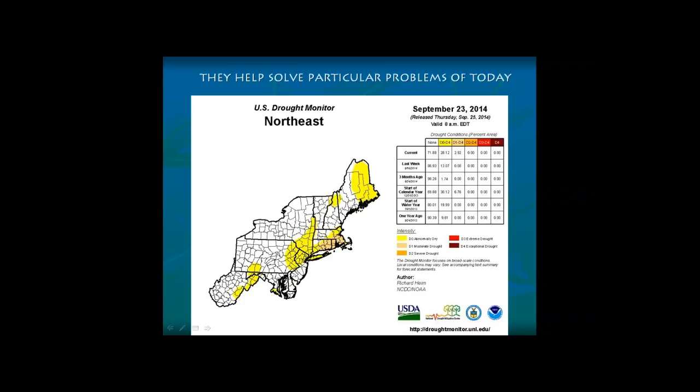And you can say that rain gardens help to solve particular problems of today. All you have to do these days is turn on the news or read a newspaper, if you still do that, if you're an older type like I am, and you'll see the reasons why rain gardens are important. Drought. Not so much in the Northeast, although we do have drought in the Northeast, but the stories of the fires in California are in the news every day, and what we also learn is that the big, huge aquifer out west there is being seriously depleted. Aquifers everywhere are being depleted.

Here in the Northeast, and I'm sure all over the country, any town that pumps its water from a well often in the summer will have water restrictions because the wells start to run dry or they get very low. And so this concept of catching the stormwater and returning it to the aquifer rather than have it run down into a storm drain is something that people can understand.

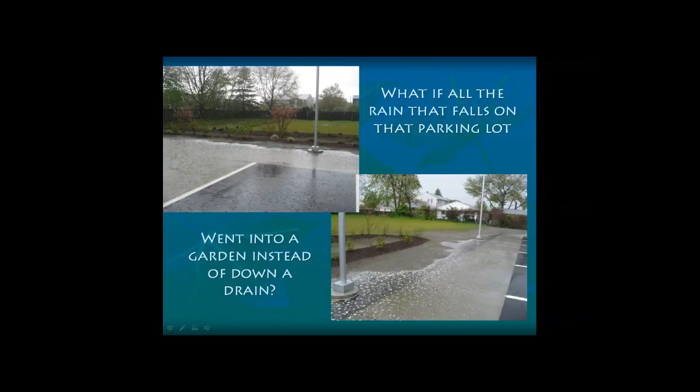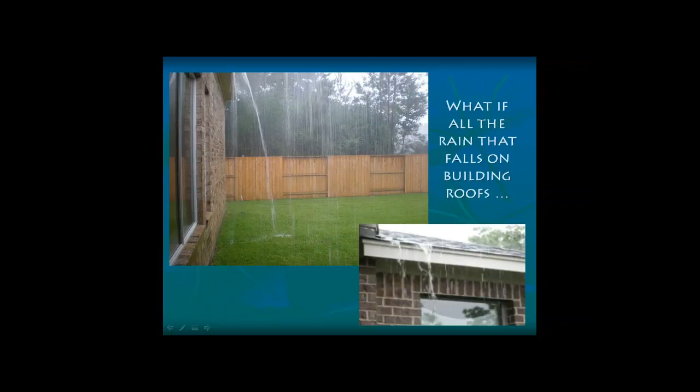And you can ask, if it's raining outside, ask people to take a look at the parking lot or the roof that rain is falling on, and think about where all that rain is going. Sometimes it's puddling in very inconvenient places, but usually it's going down a storm drain, and those storm drains pipe the water into our rivers, into our bays, when we could use a rain garden to return the water to the aquifers. So these are all concepts that civic groups can usually understand very well.

You can introduce the concept that a rain garden is a bowl-shaped garden rather than a mounded garden. People are used to seeing gardens that are bermed up just a little bit with mulch. That's been the traditional way to do a garden. But if you ask them to kind of just turn that thinking upside down and think about a bowl-shaped garden that's planted the same way, mulched the same way, and you can use the same kind of things that you would use in any garden, fence, an arbor, sculpture, bird bath, but it's bowl-shaped instead of mounded.

One of the misconceptions that I've run into is that people think, if they don't know anything about it, they think a rain garden is a water garden. They think of it as a pond. And actually, a rain garden is not a pond, although it is a garden that catches water. It's not a pond or a water feature. So that's a misconception that you can correct.

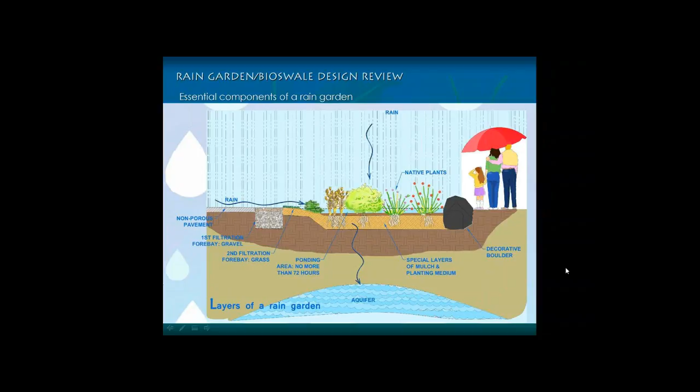And I like to use decorative boulders clustered just in small areas around the edge of my rain gardens, because since they sink down into the earth, they can be not as noticeable as a mounded up garden, and a boulder or some other sculptural element lends a little more presence to the garden. So those are the layers of a rain garden.

So if you're either creating some construction drawings for a rain garden, or say you're on a planning board and you're being presented with construction drawings for rain gardens, there are some aspects for these public civic gardens that really are necessary for you to see on the plans. And I have two examples here. I'll just show you this one quickly. One, of course, is a layout plan for the garden itself.

One is going to be a section through the rain garden, and you'll see the section line A A prime in the layout plan there, and that's going to be labeled with the different layers that we just talked about. That's so the contractor really knows what they're doing and what the different depths are, what the different materials are. On the upper right, you see that little recipe for the planting medium. This just happens to be the recipe that I use.

There are a bunch of different ones out there, but the most important thing to notice is that it's mostly sand, believe it or not. There's a little bit of silt, much less clay or no clay if possible. Sand is really what you need to use for this, and then after this is mixed, you mix in a little bit of aged compost too to give the plants just a little nutrition.

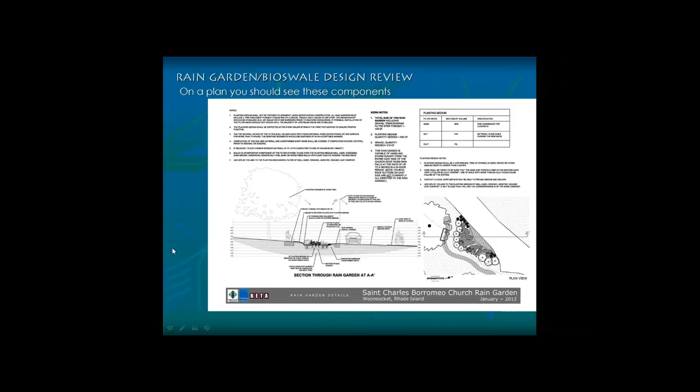That's very important. And then just your general planting notes over on the left there, and we'll talk about what those contain. Here's another one. It's maybe a little bit more readable. I actually have a section of materials quantities here. This is a rain garden where parts of it were being donated, and so if you're sending a sheet like this out to different suppliers, it's always nice to have your quantities calculated.

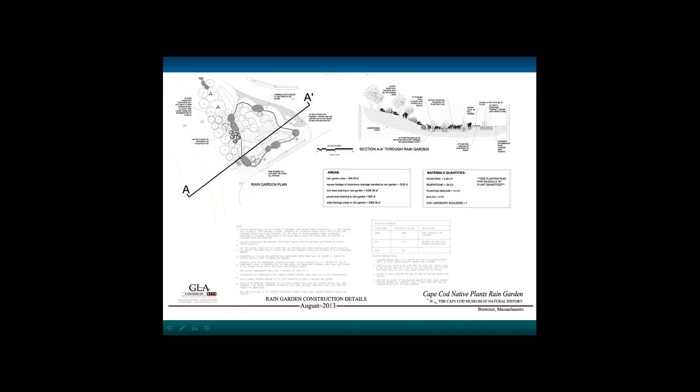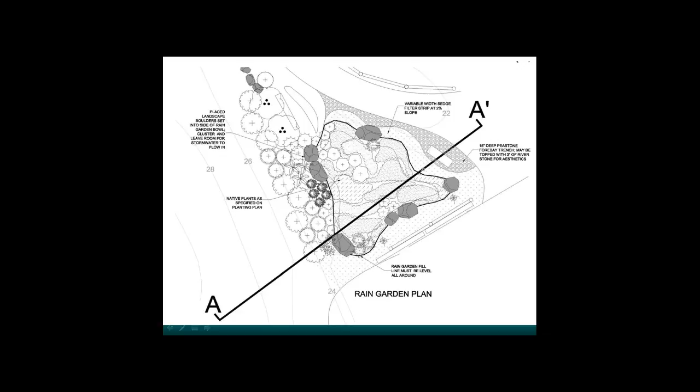And we'll just look a little closer at some of these elements. Here's the layout plan. And you've called out the different areas and the different materials, and you would have also called out the dimensions on this one. There's the section through the garden. Really helps the contractor to visualize what they're doing.

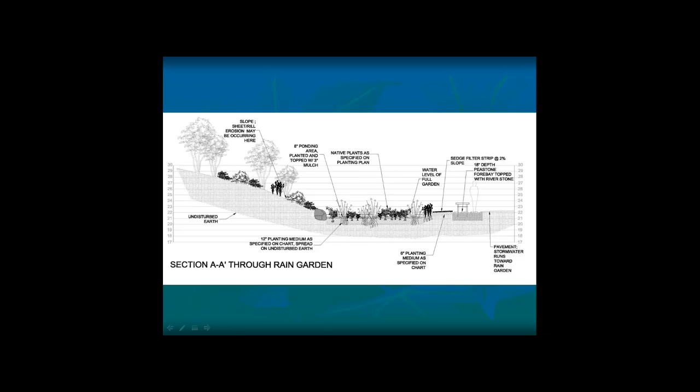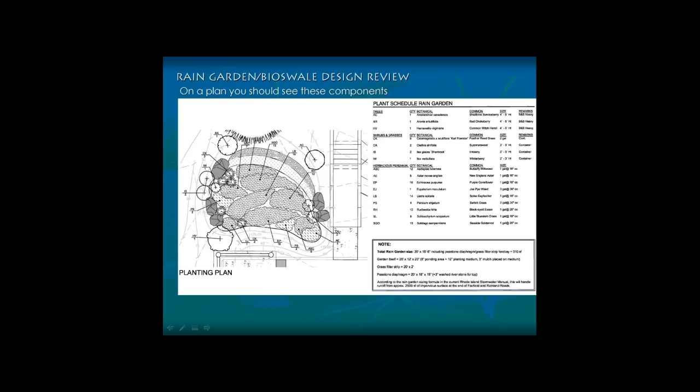The thing about a rain garden is that because it is mostly dry and every once in a while very wet, you need to choose your plants carefully because they need to be able to withstand short periods of inundation, having their roots completely underwater, and then long periods of dryness. It might be a month or more of dryness. Because once the garden is established, you do irrigate to establish the plants, but once it's established, the only way those plants are going to get water is if there's a storm. So I find that you end up choosing plants that you would often just see growing by the roadside, the goldenrods, the asters, that sort of thing.

Here is a really important aspect. It's the sizing. You have to remember that a civic rain garden is a stormwater practice. It's beautiful, it touches our hearts, but it's also an engineered thing. And so it's got to be sized properly. And so you need to see on the plan some kind of evidence that someone's been brought in to properly calculate the amount of stormwater that the rain garden is going to accept.

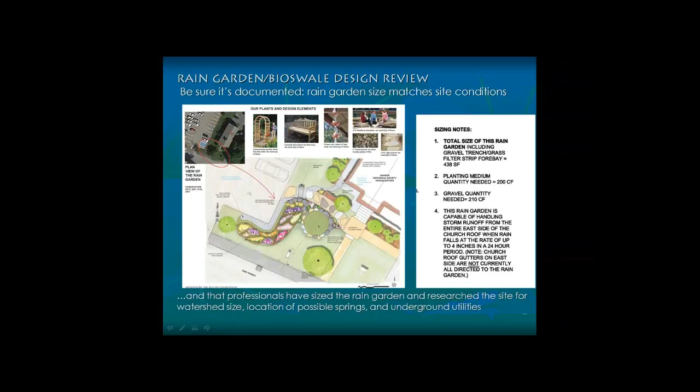And in this slide you see a little hand-drawn plan of a rain garden we'll see later on in the show. But you can see there's a parking lot. The rain garden is adjacent to a parking lot and also adjacent to a building roof, that Sharon Historical Society headquarters. And so I went in and actually calculated the area for a certain number of year storm, and calculated the amount of rain that would be coming into the garden at once, and then I calculated the size.

There are online tools you can use to calculate this, but I would strongly advise bringing in a professional if you're doing a rain garden like this. It could be a professional who's volunteering on your board. It doesn't have to be someone you hire, but you really need a landscape architect or an engineer who knows what they're doing, because there are instances of rain gardens that overflow because they have not been sized correctly.

And some of the issues that have to be checked are taking a look at the soil. Did someone dig a test pit and see what's down there? Does it actually perk? Is there a slab of clay maybe, or you might be right over ledge, and the filtration rate might be very, very slow. Often in a town center or near a sidewalk, there are going to be underground utilities you have to know about. I have heard of instances where rain gardens were dug near underground springs that nobody knew about, and the rain garden completely failed. So you need to know about those things.

And then also, if you're working in a town center that has a drain system already, you can sometimes connect your rain garden with those drains so that if you need to do a smaller rain garden and you do expect it to overflow every once in a while, the existing drains can accept that overflow. But you need to coordinate that with an engineer. So this is sort of a caveat, not to just go out there and do it yourself unless you have this kind of expertise at your fingertips.

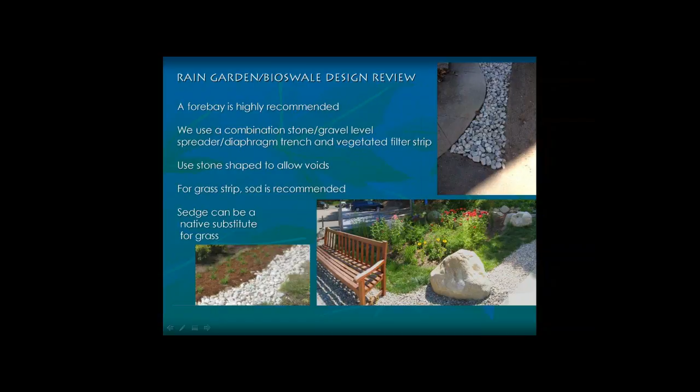And there's a forebay all ready to go. That's right in the middle of a parking lot, and you can see the gravel strip, and then that is actually a sodded grass strip after that.

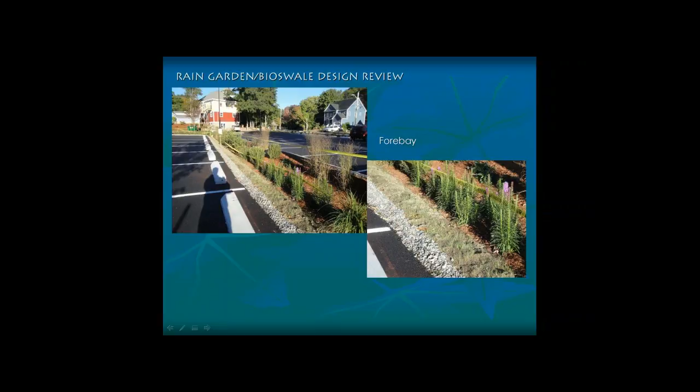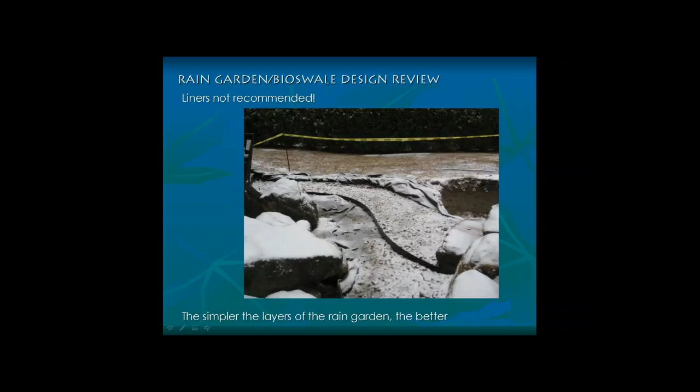This contractor had put a liner at the bottom of this forebay strip, and I had to have him take the whole thing out. Unfortunately, liners are not recommended. So if you see that on a detail, you should take it out.

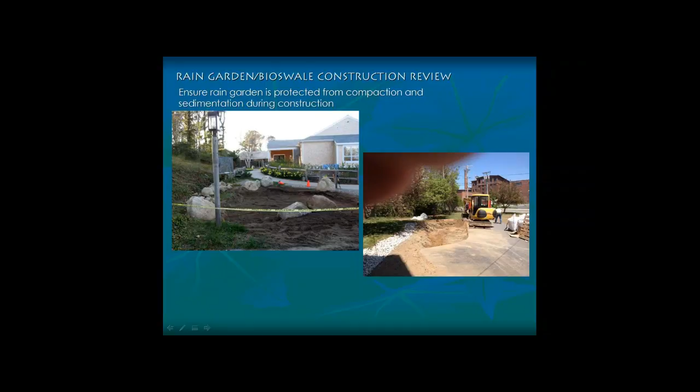And on the right, you see how this contractor has been sweeping the silt away from the edge of the garden during the entire process of constructing this garden. He was out there every half hour with his broom, just getting that silt away so that it doesn't clog up the garden before we've even got the garden launched.

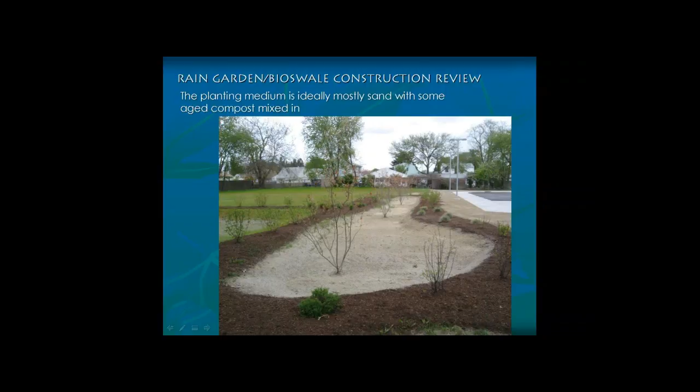And here we have a look at that planting medium. This rain garden hasn't been mulched, and we'll talk about that a little bit later. There is a controversy over mulching rain gardens, but it gives you a really good look at the planting medium, and you can see how sandy that is.

And here's just another look at that planting medium recipe. I just want to say this is not proprietary. You can find these recipes online. You can often find them in your state stormwater guidance manual, or sometimes in your highway manual for your state.

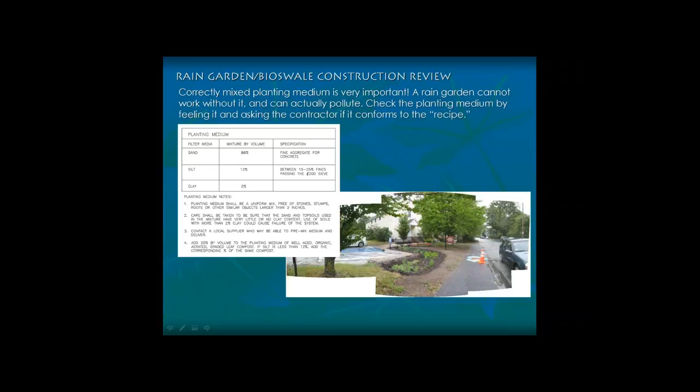So a couple of other things. As I mentioned, contractors are still gaining understanding, and sometimes you really do need to explain things. On the left is that rain garden that had the liner put in it. The other thing that was done wrong there is that they separated the materials with a strip of metal edging. They've separated the gravel forebay from the filter medium, so basically that's going to stop the water from going in there. So that had to be taken out also.

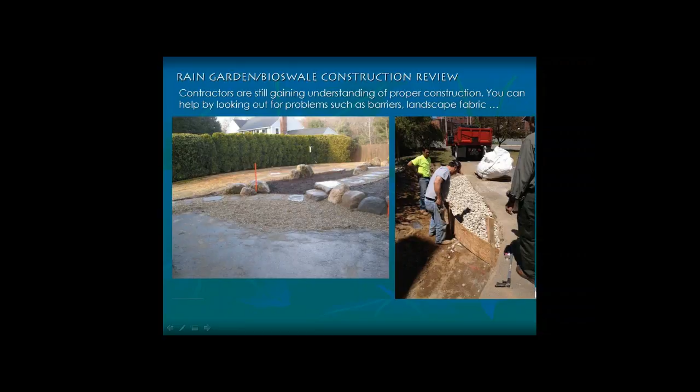On the right, you see the correct way to do this when you're constructing the garden. If you need to butt up your gravel with your planting medium, say you don't have a grass filter strip right in that area, what you can do is drive in some stakes, bend a board, fill the side that needs the gravel with gravel, fill the other side with your planting medium, and then just pull your boards and your stakes out, and everything stays exactly where it should go.

Some other things to look for if you're doing a rain garden in an island in a parking lot. This is information that comes from out west, Washington State. They've found that often the little curb cut entries that are placed to accept the stormwater into the island are not big enough. And so what happens is the stormwater actually just shoots right past the rain garden without going in. So they're recommending now that you make your curb cuts long enough, and also grade your parking lot so that it really guides the stormwater right into where it's supposed to go.

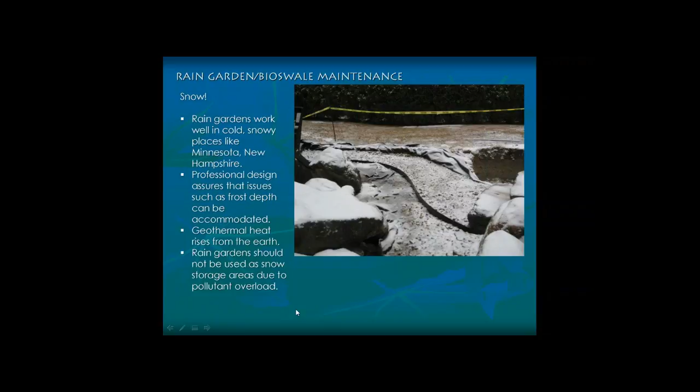However, rain gardens should never be used as snow storage areas, and that's just because that stored snow usually has a lot of pollutants in it. There's a lot of garbage in there, there's salt, and a rain garden just can't clean that well. So avoid using a rain garden if it's a snow storage area that you're also looking for there.

So for the particular parts of the rain garden for maintenance, the forebay, you can rake it out, you can pick up the garbage. If your municipality has a silt vacuum, which is a piece of equipment that's being purchased more and more now by localities, because a lot of places do have permeable pavements now, and the best way to get silt and things that will clog permeable pavement out is to actually use a pavement vacuum. And your forebay gravel strip can be vacuumed also.

You can mow the grass strip. If it's sedge, you don't have to mow it. The sedge will only grow a certain height. The mulch should be refreshed as often as you might refresh your mulch. Just be certain not to put fresh new mulch on your rain garden, because, and we'll talk about this a little bit later, that can actually contribute to the pollutants, to nitrogen in the rain garden.

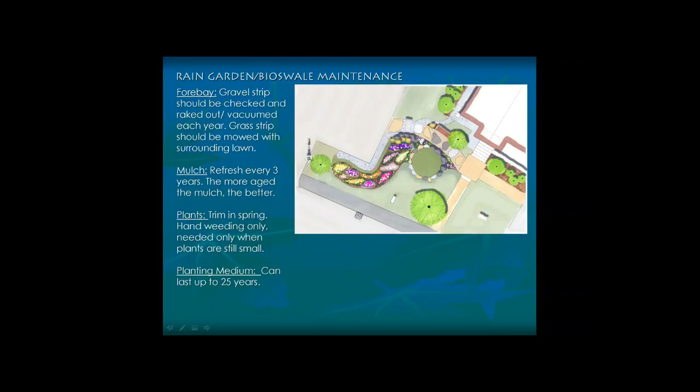The plants can be pruned just the same way as any garden, and if you plant closely enough in the rain garden, you should only need to weed when the plants are very small. They should just block out weeds once they get mature. The interesting thing is that planting medium, the filter medium, it seems from research they're doing out on the West Coast that it can actually last up to 25 years. And that's 25 years of filtration and also binding the pollutants that are coming in with the stormwater.

And just a few new trends in rain gardens to be aware of. This whole filter medium, planting medium, we touched on this a little bit before, but they're still experimenting with different mixes. A lot of the experimentation has to do with the kinds of pollutants that you're expecting in a particular rain garden. So if it's one that's draining a parking area, you're looking for some kind of minerals in your sand that will bind oils, greases, that sort of thing. If it's stormwater coming off a roof, you might be looking for different kinds of things that will bind the pollutants coming off there.

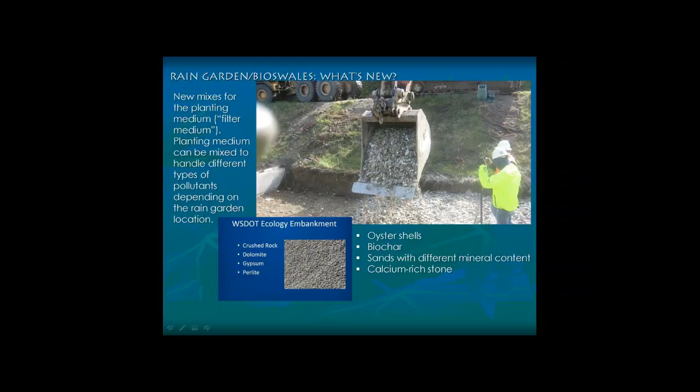And this is, again, where professionals can help, and this is how we're sort of starting to refine rain gardens now. Out west, they're using oyster shells almost exclusively in some places. Apparently, the oyster shells just soak up those pollutants and bind them so they can't go anywhere. Biochar is being used, calcium-rich stones. So it's very, very interesting.

Here's the whole mulch question. Apparently, on the West Coast, it's now being recommended not to use mulch at all. I know in several of the stormwater guidance manuals here on the East Coast, mulch is definitely mentioned as an important filtration ingredient for the rain garden. But the problem is when it decomposes. And so for now, I do use mulch, but I make sure that it's very well aged.

And phytoremediation. What role can the plants that you're planting in the rain garden play in actually soaking up some of these pollutants? It's something that's still being looked into.

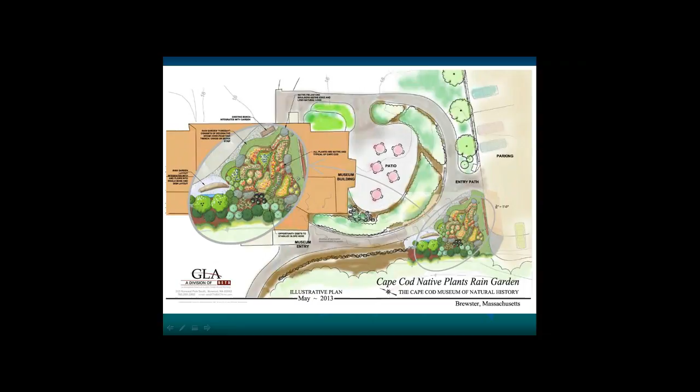This particular one, there were some archaeological concerns in that location, and the museum actually had an archaeology team and connections with our state archaeology office, and so they were able to go in there and do an excavation with children beforehand and make that a museum activity. They did find some artifacts, and they have a little exhibit inside the museum now. Those are the kinds of educational activities that can be brought into these civic projects.

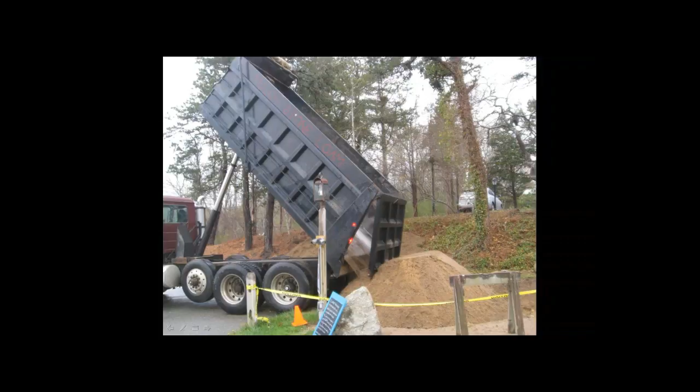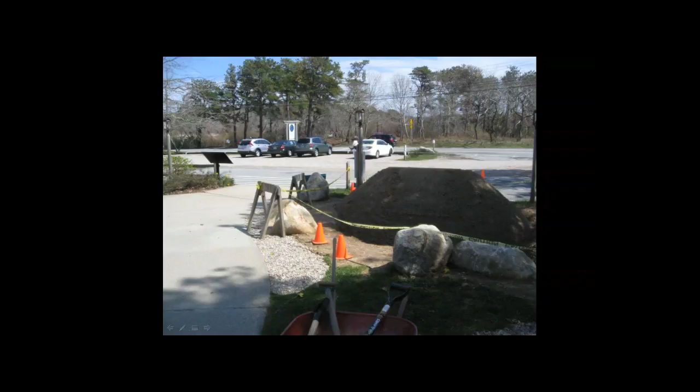There we're receiving the filtration medium, the planting medium, and you can see how sandy it is. The boulders are being placed, and that planting medium is just waiting to be spread out in the bowl. And now it has been, and that garden is all ready to be planted. We received donations of plants for this one, and they've all been placed.

And then we had a museum planting day. We invited people to come in and plant a plant in the rain garden, and here's our crew doing just that. And there's the result. And that's another view of the result. And I want you to just take a look at that boulder in the back underneath the sign. You can see sort of a black hole in it.

What I like to do with these rain gardens is really make them more than just an engineering technical thing. I like to try to connect them with their site somehow. And when we received our boulders, we noticed that one of them had this blast hole in it. And of course, I was scratching my head and pacing around and going, oh my gosh, we're going to have to bury that hole. And the contractor took a look at it and he said, no, no, no. This is a rain garden for children. That's a spyglass. And I said, oh my gosh, you're right.

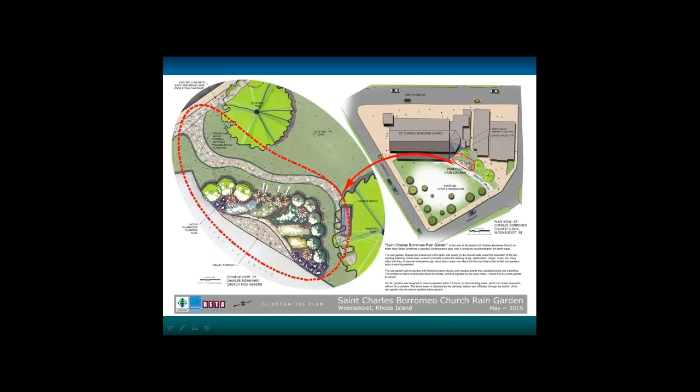And then the last one is one you've seen images of in this presentation, the Sharon Historical Society, with this big parking lot right next to it and a big roof, and a school in town that was looking to do something great for the town center. They were studying water that year, water around the world, and they decided to do a rain garden. And so this site was chosen.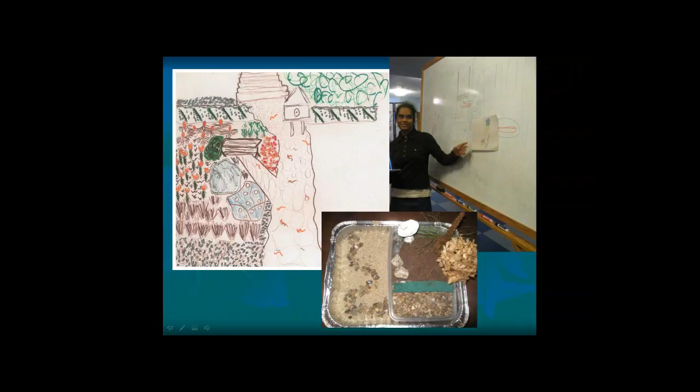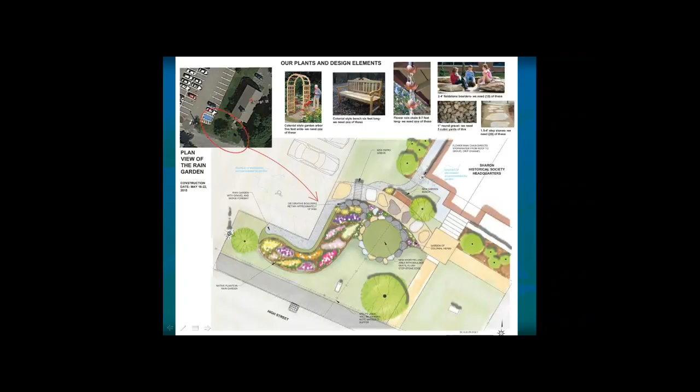The girls did an actual community meeting with the members of the Historical Society, such an important part of any civic landscape, and the girls learned how to do that. And then we came up with this plan. We pulled together all of their different ideas. We pulled together this plan, and then once Yard and a Half had gone in and actually excavated the garden, which you see up at the top there, the top left, the students actually planted the plants.